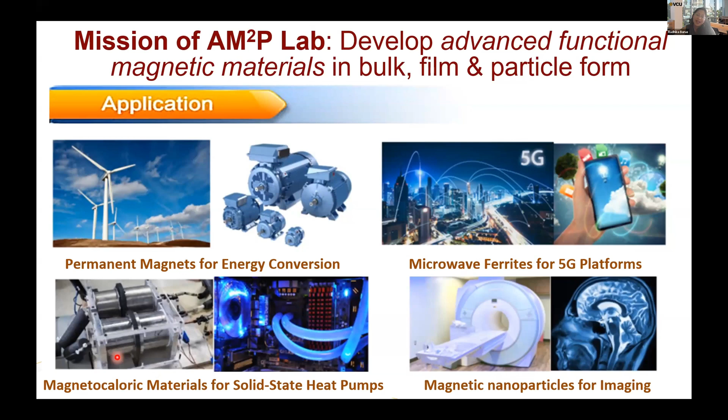We are funded by NSF, the Commonwealth Cyber Initiative of Virginia, as well as the Commonwealth Center for Advanced Manufacturing at Virginia. Today I'm going to mostly focus on Vaibhav's research—thank you, Vaibhav—and we will be mostly talking about magnetocaloric materials.

A little bit of fundamentals on what a magnetocaloric material actually is. By definition, a magnetocaloric material is one that undergoes a reversible temperature change upon application and removal of a magnetic field under adiabatic conditions. Now any magnetic material will do this—if you apply a magnetic field and remove it, it will undergo a temperature change. Even iron would do this, but when it does, the temperature change is very small.

So to see a pronounced temperature change, the magnetocaloric material must demonstrate a strong spin lattice coupling. Typically, this response is most pronounced when it occurs in the vicinity of a magnetic transition. To explain this, let's look at a prototypical magnetocaloric material, a nickel-manganese-gallium Heusler alloy.

The nickel-manganese-gallium Heusler alloy at room temperature shows an L21 crystal structure, such as that shown here. It is ferromagnetic at room temperature. Upon heating, it undergoes a Curie transition, a ferromagnetic to paramagnetic transition at around 360 Kelvin, and this magnetic transition is accompanied by a simultaneous crystal structure change from an L21 to an L10 crystal structure. So it's concurrent.

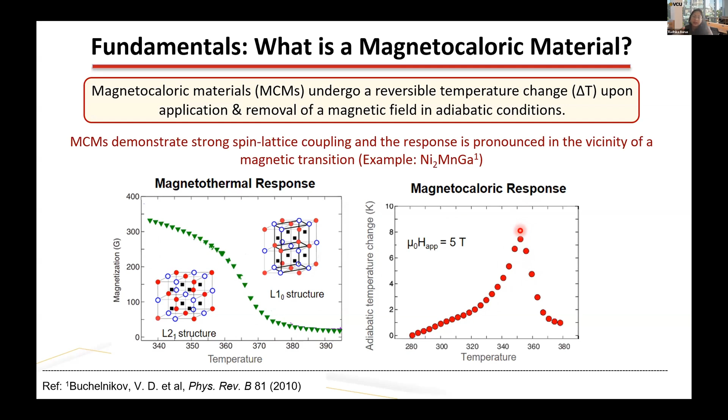Depending on the temperature at which we see this magnetostructural transition, magnetocaloric materials can be used for a number of potential energy-related devices. A material that shows a low temperature magnetocaloric response can be used for hydrogen liquefaction purposes. Those that show room temperature MCE effects are of tremendous interest for magnetic heat pump devices, so magnetic refrigeration. And those that show magnetocaloric effects at high temperatures can potentially be used for waste heat energy harvesting.

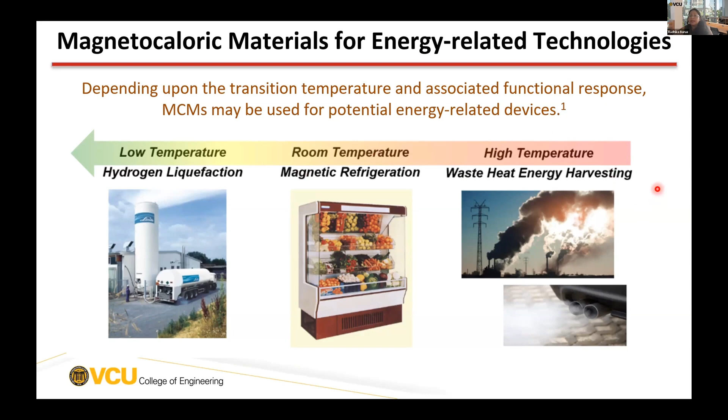Regardless of what the material does, in order to use the material to realize its true potential, it has to be deployed within an active magnetic regenerator device, known as an AMR device.

I show a schematic of it in this slide. Note that the key component we are interested in for our research is this porous heat exchanger, which is also called the regenerator.

In ideal circumstances, this regenerator is made entirely of a magnetocaloric material. It demonstrates a large magnetocaloric response, manifesting as an adiabatic temperature change, delta T, and a magnetic entropy change, delta S, at moderate magnetic fields, less than 2 Tesla preferably. The material should demonstrate high thermal conductivity, low heat capacity, and high electrical resistivity to reduce eddy current losses.

This is because within the AMR device, the regenerator moves in and out of a magnetic field. It should be mechanically and chemically stable. From a manufacturability perspective, it should be made entirely, if possible, of geo-abundant elemental constituents, with no rare earths, and it must be easy to manufacture with customized porous architectures. A regenerator must have voids, because from a system integration perspective, it has to allow flow or passage of a heat exchanger fluid.

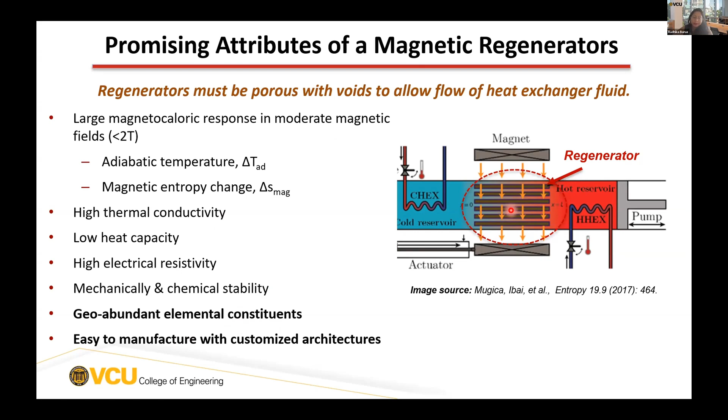Typically, regenerators are made either as particle beds or as plain plates, which possess inherent challenges that reduce theoretical performance in a device prototype. For example, a packed bed with prolonged use leads to segregation of particles, causing pressure drop along the length of the regenerator, and in extreme cases, flushing of particles into the surrounding heat exchange media.

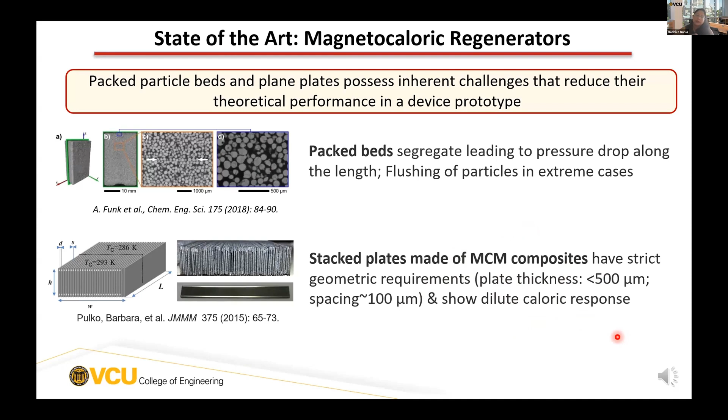The other way of making it is stacked plates using MCM composites, magnetocaloric particles with binders. Because of the binder, they show a dilute magnetocaloric response and have very strict geometric requirements. For instance, the plates have to be less than 500 microns thick, spaced 100 microns apart, and in ideal circumstances are not very easy to make.

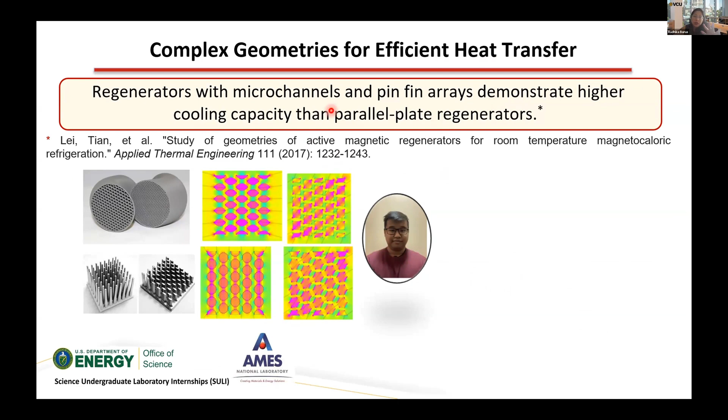Theoretical studies show that regenerators with microchannels and pin-fin arrays are better than stacked plates, demonstrating quite high cooling capacities. If you have a microchannel regenerator geometry, we would ideally want it compositionally graded along the length. Note that with a magnetocaloric material, at any given point only a single part of the regenerator experiences the maximum magnetocaloric response.

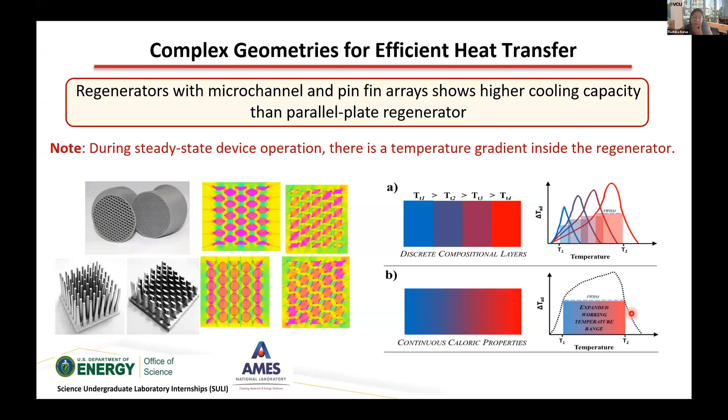This leads to the concept of a graded regenerator, where we stack up magnetocaloric materials with transition temperatures near each other, leading to an expanded working temperature range. That's not very easy to make using conventional machining methods like boring, milling, drilling, etc. This allows us limited control over the internal structure.

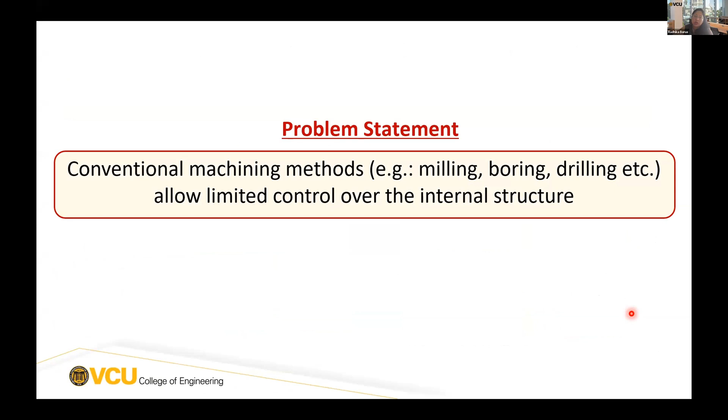So with this, we turn our attention to 3D printing. We are looking into additive manufacturing schemes of regenerator fabrication in our research. 3D printing essentially encompasses several manufacturing technologies that build net-shaped parts layer by layer. There are 7 different types of 3D printing, and they each vary in their form, or whether they are amenable to plastic or metal.

They differ in material selection, surface finish, durability, manufacturing cost and strategy. But regardless, all these techniques allow us to get high quality parts with functionally graded design and fewer geometrical constraints. So that's what we want to do.

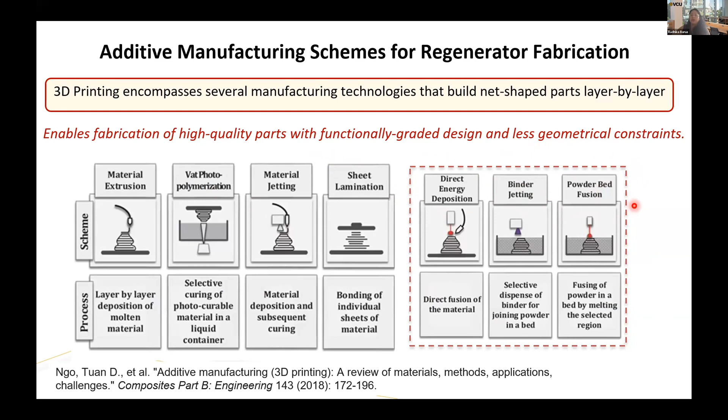In the literature, researchers have used direct energy deposition, binder jetting, and powder bed fusion techniques to make microchannel thin-walled regenerators. Here's an example of work done by the Fraunhofer Institute, where they attempted to use powder bed fusion to make heat exchange structures.

Powder bed fusion is a technique where there's a bed of powder, and you fuse it by melting a selected region with a laser. In this study, a base alloy of lanthanum iron silicides was used, and once the net shape channels were printed, they were subjected to heat treatment and hydrogenation using post-processing.

At first glance, their net shape samples look really nice. They show high delta S values of about 4 joules per kg Kelvin at a very low field of 1 Tesla. You can stack it up to form a cascaded structure. They have wall thicknesses of around 300 microns with channel diameters of 600 microns.

But if you look closely in their SEM images, you can see the channels don't have uniform size, and upon post-processing, it also leads to molten particles within the channels, which is definitely not wanted.

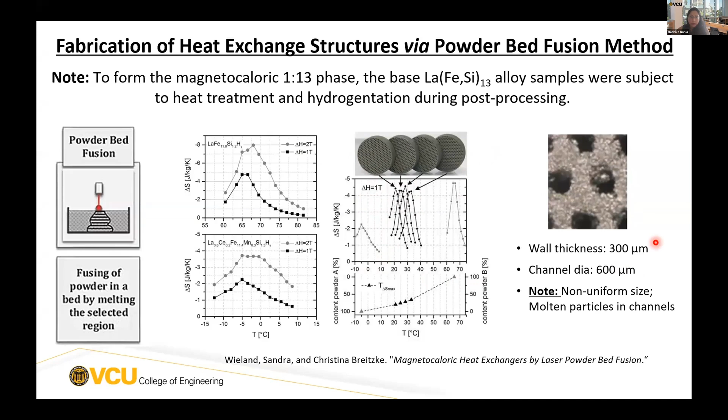Another method that has been tried by Oak Ridge is binder jetting. Here, there's no melting and remelting of the powder. What happens is we have a powder bed, and a binder comes in and is dispensed.

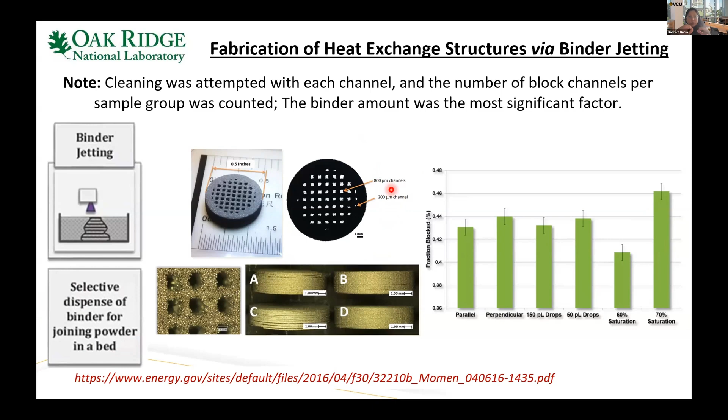So it joins the powder layer by layer. The Oak Ridge group has been able to make microchannels with channel widths as small as 200 microns. But the smaller they get, they noticed there was more clogging observed.

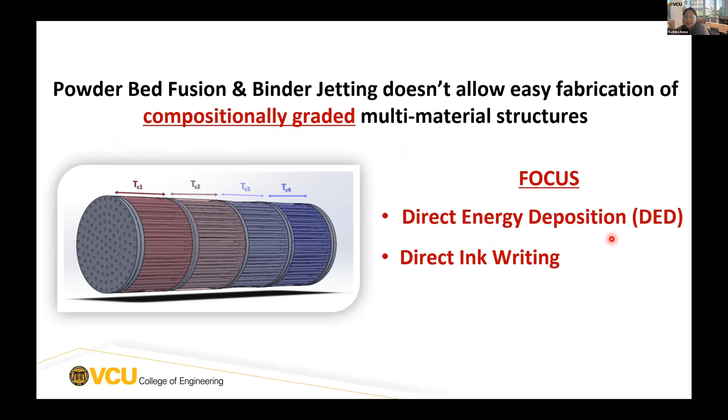With this, we turned our attention to two different methods, because powder bed fusion and binder jetting have their inherent problems and don't allow us to make compositionally graded multi-material structures. So what we're doing in our research is looking at DED, direct energy deposition, and direct ink writing. I'll go through some of our work results.

The first is DED. DED is a little different from powder bed fusion and binder jetting in the sense that powders are fed within a nozzle, and it allows us to make multi-material structures because the precursor powders are deposited simultaneously into a melt pool created by a laser, and then we can draw the print head upwards. We've made cylindrical rods and honeycomb structures using this technique.

This work was done during the very end of my postdoctoral research when I was at Northeastern University under the auspices of an ARPA-E project.

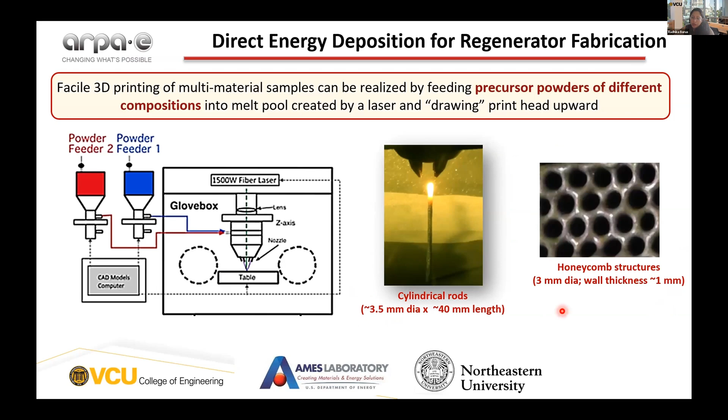What we chose to do in the project is focus on a lesser known magnetocaloric material, aluminum iron boride, simply because its composition allowed us to use two different powders and two different nozzles, to test the feasibility of making a graded structure.

Aluminum iron boride is not as good as lanthanum iron silicides, but it shows a moderate magnetocaloric effect, a delta T of around 2.2 Kelvin. You can tune the delta S to 4.6 joules per kg Kelvin at 2 Tesla.

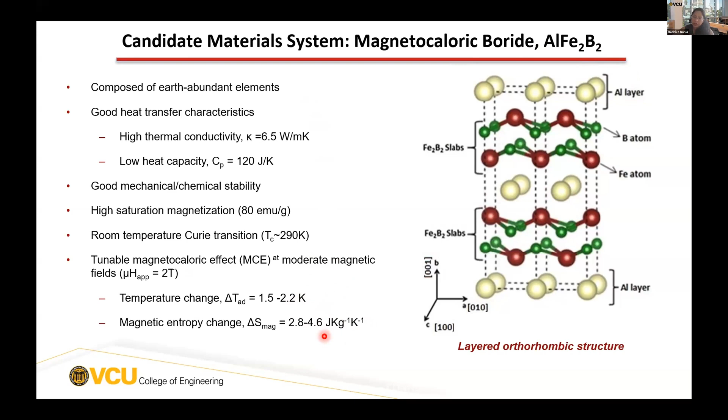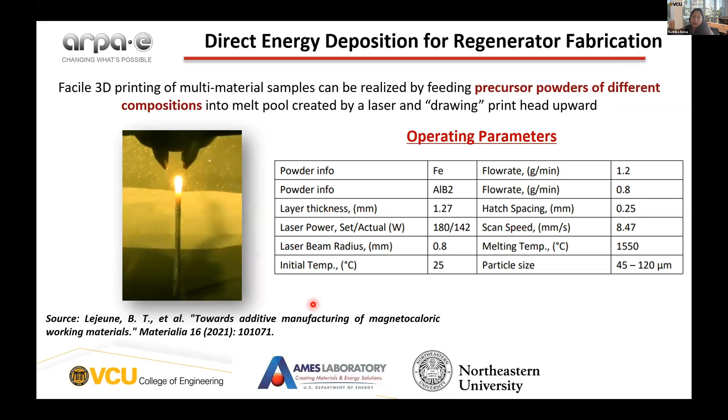We found that we could make structures that were compositionally homogeneous using the operating parameters shown here, but it took us a while to optimize all the parameters. There's a lot that goes into 3D printing.

Once made, the samples were multi-phased, so we saw the desired phase, AlFe2B2, and a couple of other phases, which is very typical — you would get it even in a cast sample.

Following our previous guidelines from studies on cast samples, the 3D printed samples were annealed at 1100°C for 72 hours. It was observed that the printed rods looked really good, but we couldn't get homogeneous samples in the honeycomb printed samples, which was unfortunate.

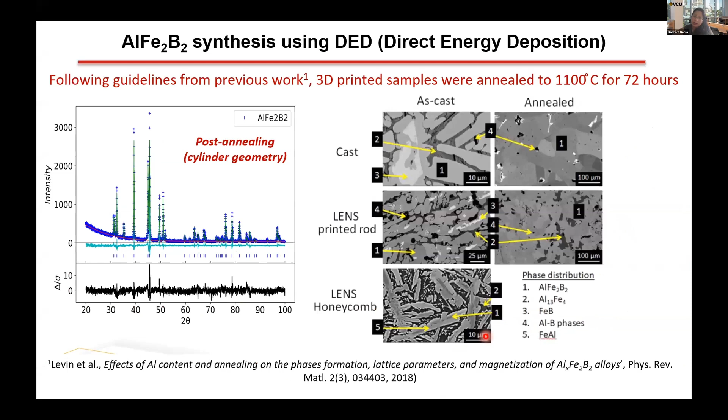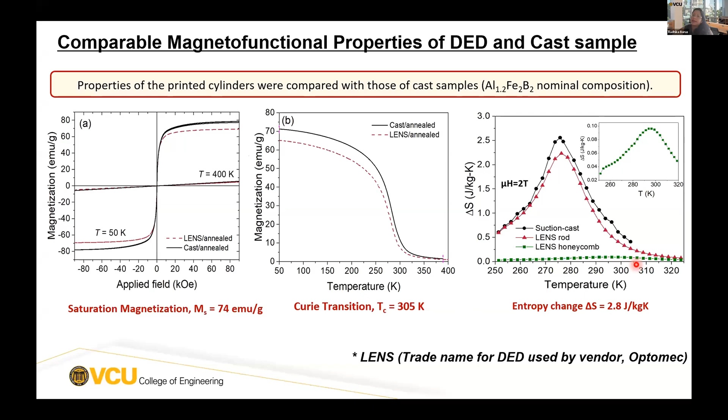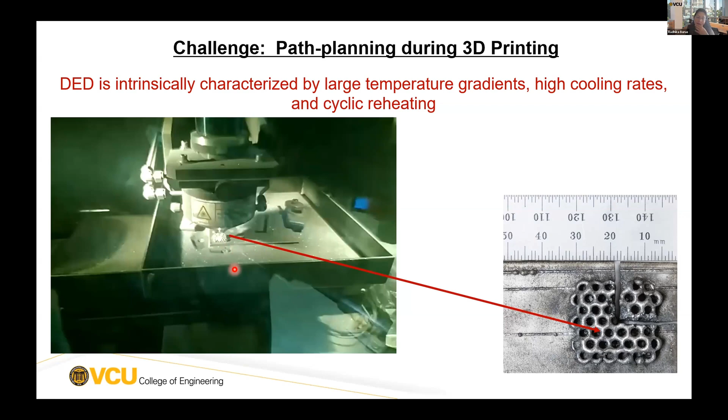So path planning is very important. While it's easy to make a rod with no path planning needed, when you have an intricate structure, that needs to be optimized quite a bit, and that's something we're working on right now. But that is a big problem with DED.

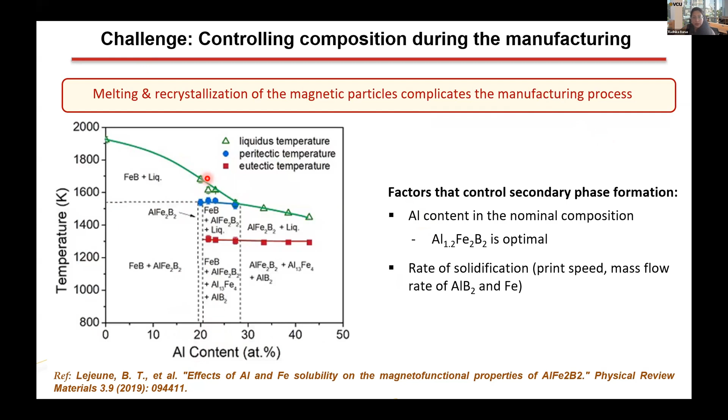If you're off, you won't see it, because there's a very tight compositional tolerance to get the magnetostructural response. So to do away with melting, recrystallization, and so on, we decided to move our focus from DED towards something more room-temperature-like. So we worked with direct ink writing.

Direct ink writing is essentially a three-step process where, instead of starting with powder, we start with an ink. Our starting material is an LCMO powder combined with a sacrificial binder, additives, and a tri-solvent resin to make an ink that flows nicely.

We use that ink to get the structure that we want, and then once we've done that, we burn away the binder. We see some shrinkage happening in our samples, but what we end up with at the very end is a consolidated metal part.

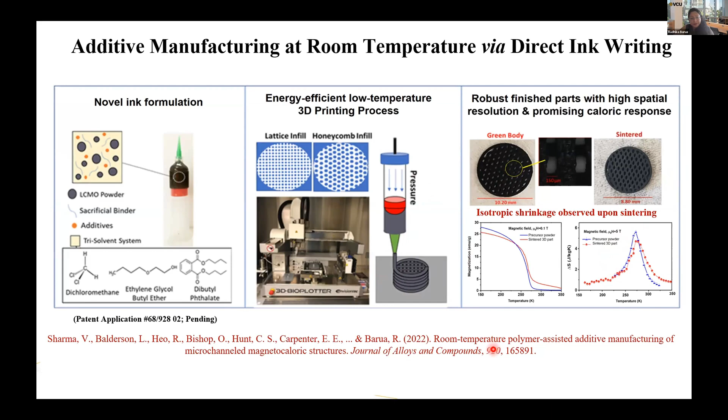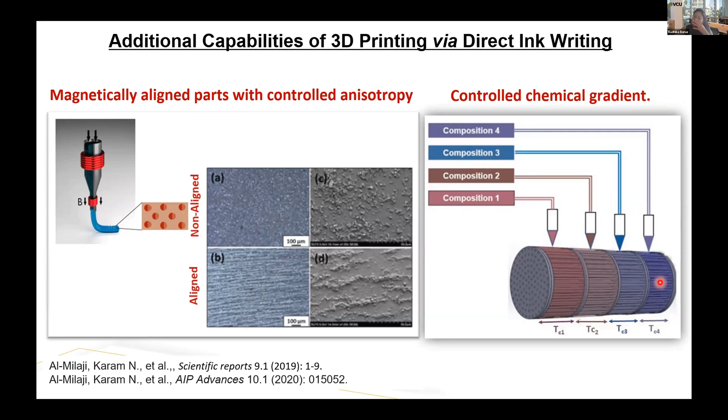If you use different nozzles, you can also get a controlled chemical gradient. With that in mind, we've done studies with magnetocaloric particles that are LCMO oxides, as well as lanthanum iron silicides, with the selection of binders. We have a patent on the ink, using a certain ratio of 3 solvents and an additive which is proprietary because it's patented.

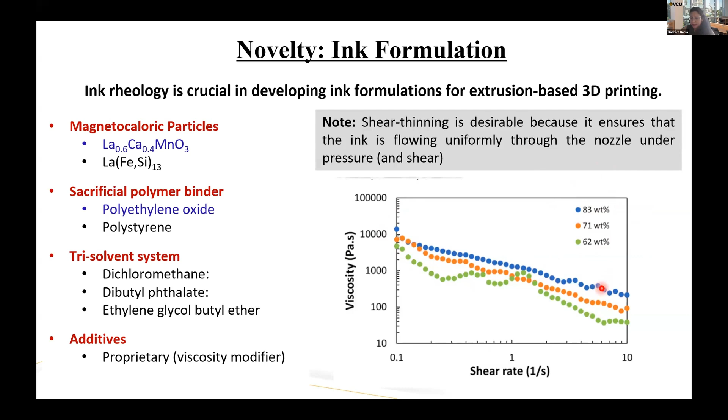What we have demonstrated is the feasibility to 3D print magnetocaloric structures with spatial resolutions as small as 150 microns. The structures we have are isotropic, and when we see shrinkage within the microchannel structures, we see uniform shrinkage.

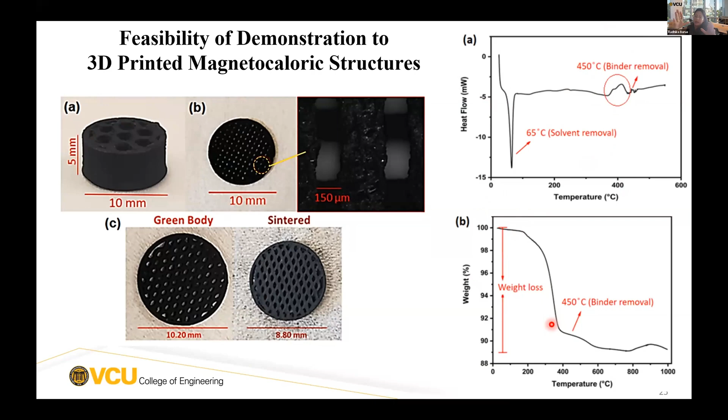Once the parts were made and shrinkage was observed during sintering, the sintering protocol was determined using DSC, differential scanning calorimetry, and we found that 450 degrees is optimal to remove the binder. All samples were sintered first to 450 degrees Celsius to remove the binder, then to higher temperatures to achieve densification.

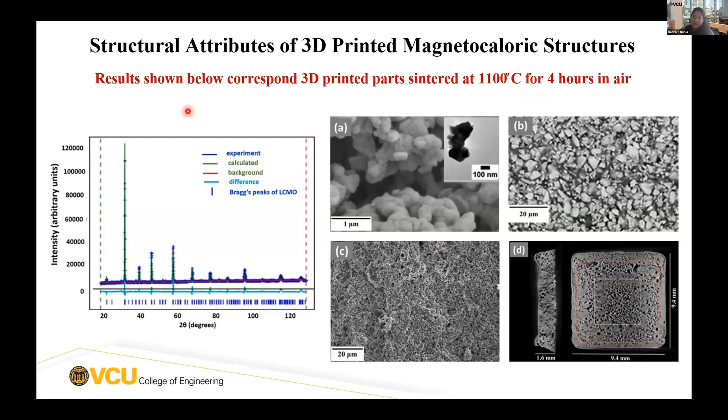We've done some work on understanding how to control porosity, and we understand now that precursor powder morphology matters. In our studies, LCMO powders are synthesized through a modified Pechini sol-gel method, which is a very easy way of synthesizing magnetic nanoparticles. You can tune the microstructure by tuning the annealing temperature, going all the way from 100 nanometers to micron-sized particles by just changing the annealing temperature during synthesis. We notice that larger particles show greater magnetocaloric response.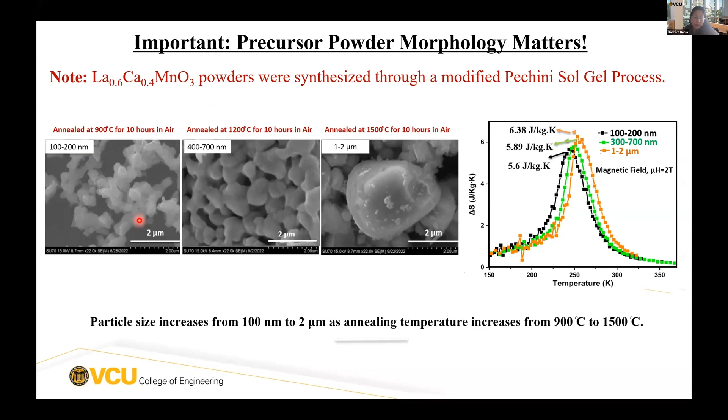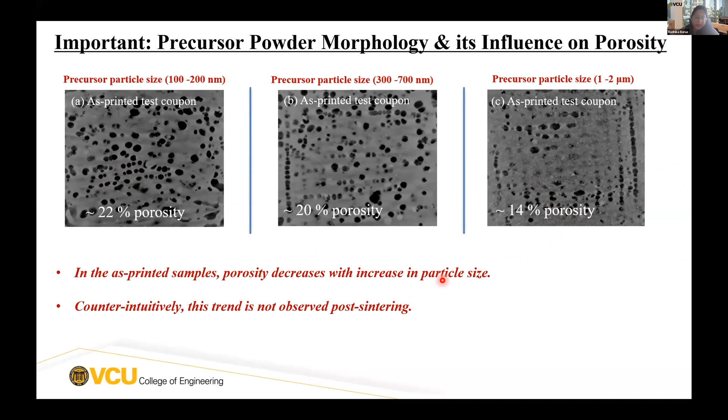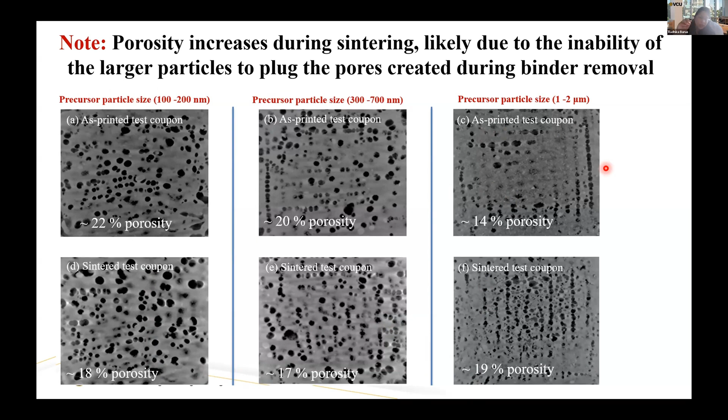So probably in order to optimize porosity, it would be best to use a combination of small and large particles, a hypothesis that we are working towards validating right now.

We also looked at the magnetocaloric response of our 3D printed test coupons, and found that the T sub C as well as the delta S of the sintered parts were definitely larger than that of the precursor powders. But porosity also plays an important role here, and typically, if you have large particles, your samples show smaller delta S or MCE properties than parts made with smaller particles. So that's the conclusion we have right now.

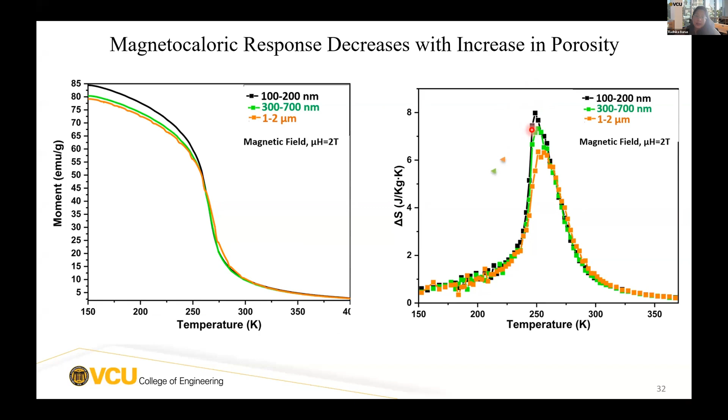We're still trying to optimize porosity and magnetocaloric response. Of course, LCMO was a starting point. We would like to try better magnetocaloric materials with enhanced response, even in particle form, and it would be best to have a spherical morphology, because that is the gold standard for additive manufacturing—we want spherical particles.

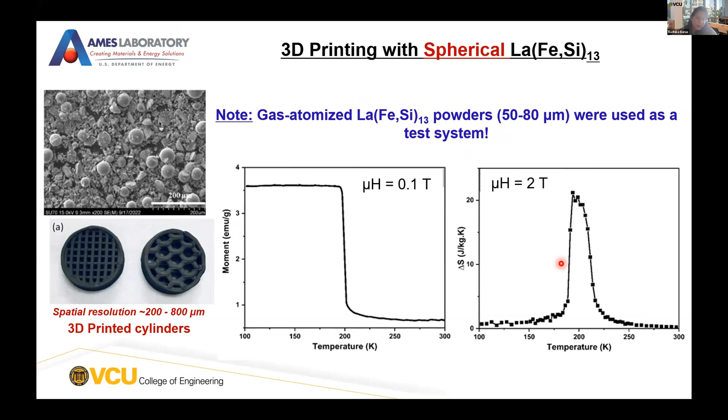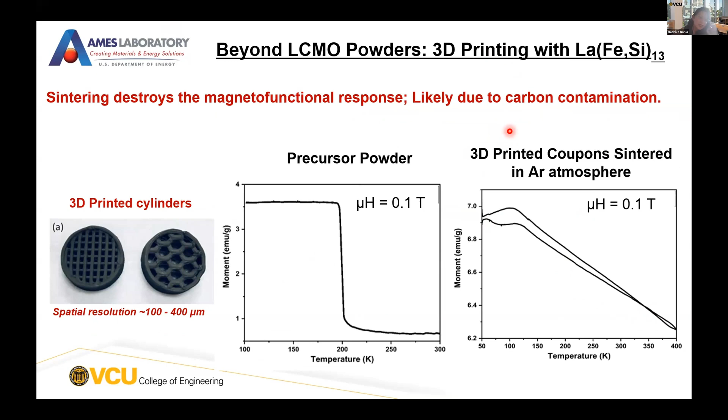We've tried working with gas atomized LaFeSi powders obtained from collaborators at Ames Lab. Although it was possible to 3D print them, sintering destroys the magnetocaloric response, partly due to oxidation and partly due to carbon contamination from the binder. LaFeSi is very sensitive to chemical effects.

The carbon in the binder can interstitially sit in the lattice, messing with the magnetocaloric properties. In summary, we've shown that DED and direct ink writing are both amenable to a certain extent for fabricating graded thin-walled regenerators.

Of course, there's work to be done. We are working towards replacing PEO as the binder to minimize traces in the samples during post-processing. We've also conducted experiments in collaboration with University of Virginia at the 2BM line at Argonne National Lab to understand how the binder is leaving the system and how that affects porosity. It's all work in progress.

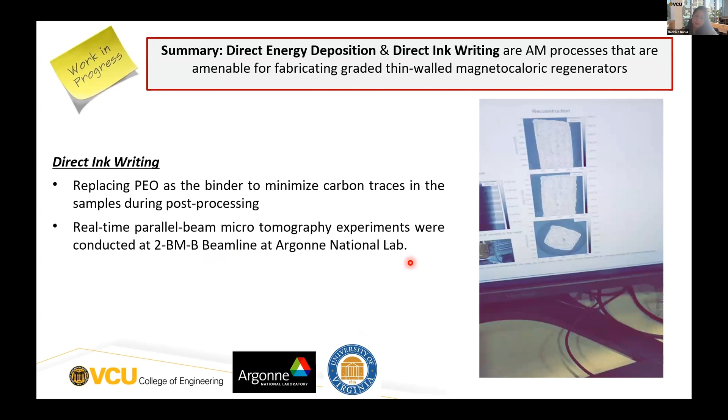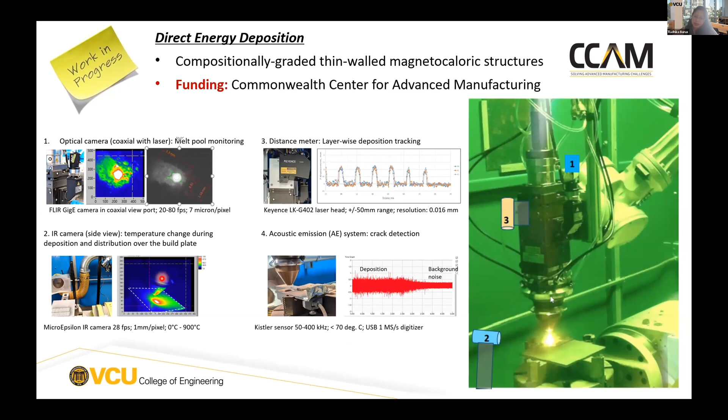Our DED work is also still being continued in collaboration with CCAM. This is a new project that we've started, so it's work in progress. Watch out for more results.